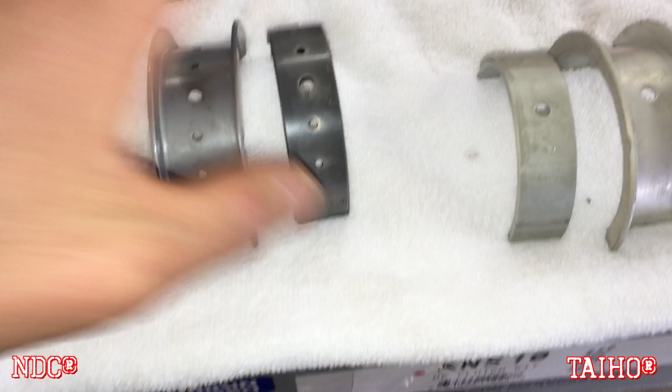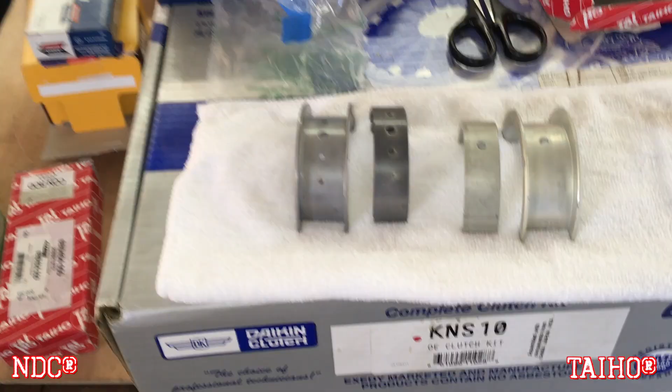Now these are the Taiho. These are the ones I typically like for all the Toyota motors. And they look almost aluminum. The thing to notice here is the number of oil holes. These are throughout all of the bearings. There's 5 holes to pass oil to the crank. These are singular. Let's take a look at the OEM bearings and see what these are. I think they're just the singular holes.

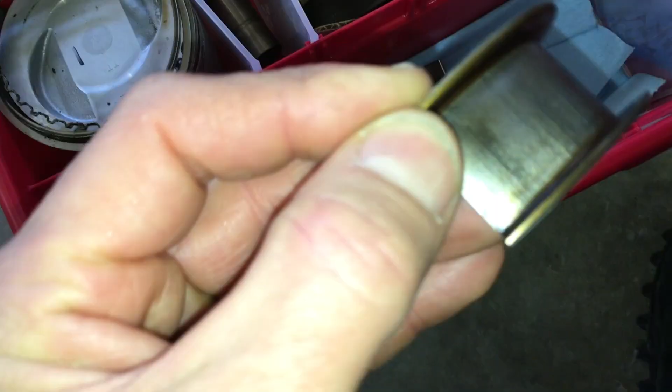Yeah, so these original bearings are most likely a Taiho bearing. Actually, Nissan put their own stamp on it, they don't say. But the color, that's what's so weird, the color on these indicates more of the bearing type that the NDC bearing is, except I've noticed the singular oil hole.

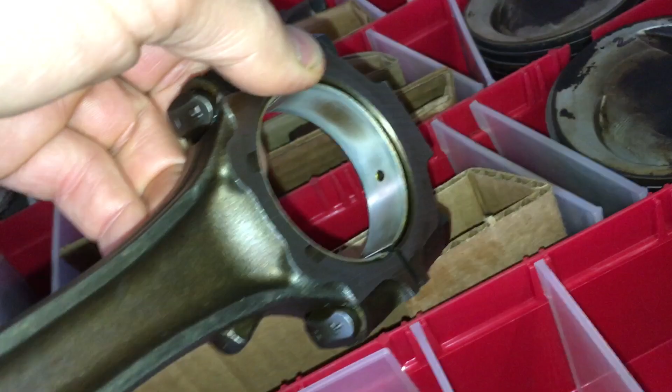Yeah, those are very interesting. Singular oil hole. I wonder if that was like that in both of the engines that we disassembled. This one's out of the silver 2000 Nissan Xterra. This one is out of the red one. The bearings are in there, and they are singular hole. That's very interesting. Well, it makes you wonder which ones are the appropriate ones and which one we want to use.

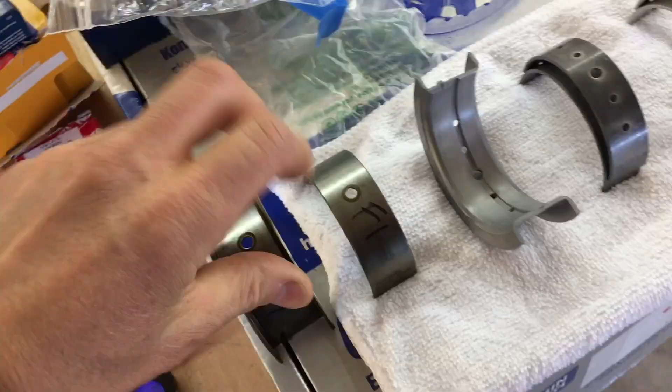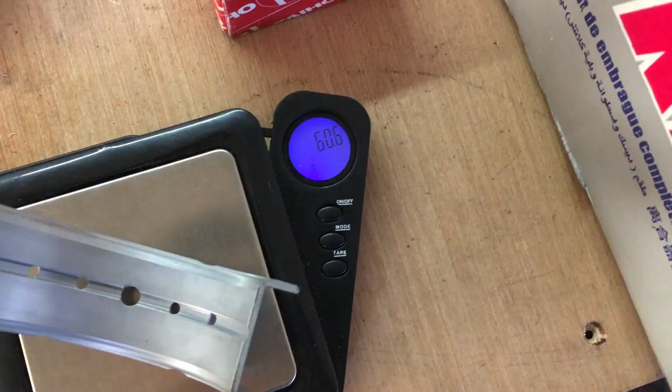The question I wonder is, how much do they weigh? Are they very similar in weight? This is the OEM bearing that was installed. Oh, this is actually out of the JDM engine, 53.8 grams. This is the NDC bearing that's got multiple oil holes in it, a bit heavier, 60.6 grams. And this is the Taiho bearing, 62 grams. It's even heavier. That's really interesting.

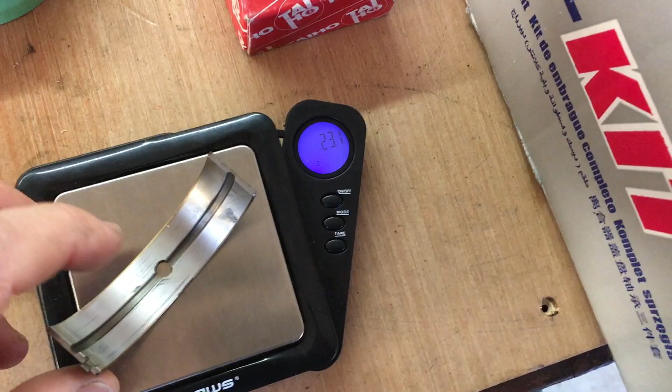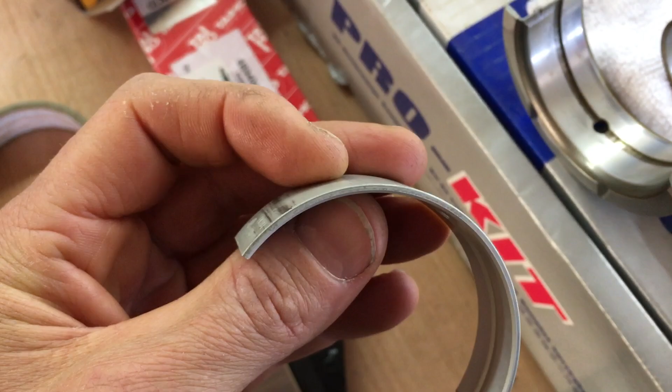So let's look at this, this is the OEM, different position. There's 3 different sizes of bearings on each crankshaft. 23.1 for the OEM. 24.9 for the NDC. 26.2, wow, for the Taiho bearings. That's interesting. What's most interesting is the oil hole design here.

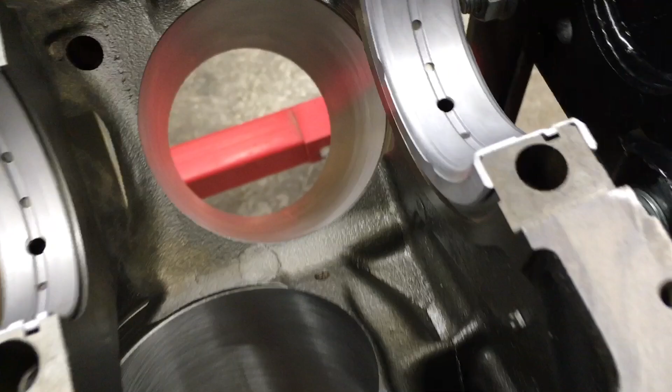I'm not sure that this matters because these are the NDC bearings. These actually are labeled Safety bearings. I've got a little shop in Denver that's really pretty awesome. They have the ability to get all of this stuff from Safety, the company out in California, made in Japan. That's what I usually look for. I can't buy from them directly because I don't buy enough, but the shop in Denver allows me to get these.

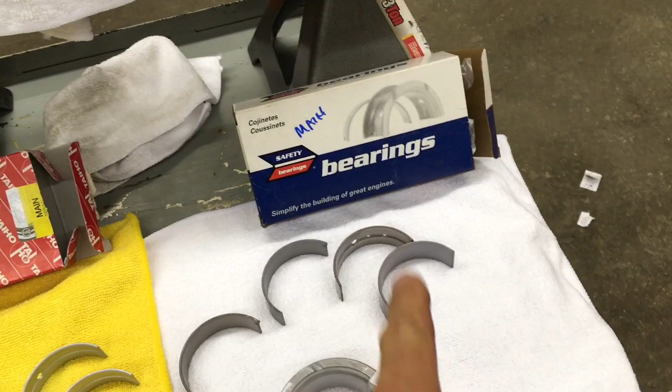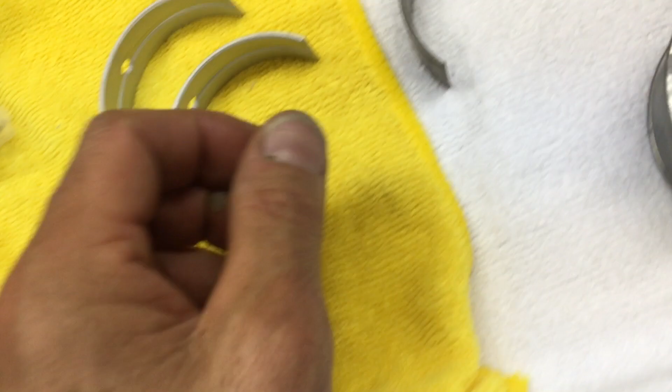And what I noticed right off the bat was the difference between the NDC and the Taiho. There's literally a Nissan part number that's different for the bearings that came from Taiho and the bearings that came from NDC. So that's actually pretty interesting. I'm not seeing Toyota do that with any of their stuff. So these are the NDC and these are the Taiho. And I got this from that same small shop in Denver, but I don't think they sourced these from here. Taiho, yeah, these are original. So, oh, look at this. So these are NDC, this is Taiho.

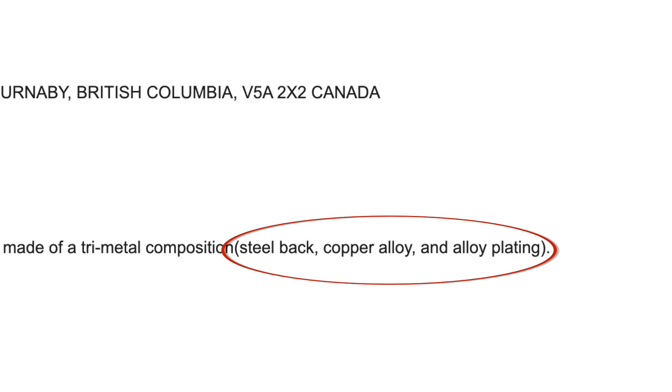And this is supposed to be a tri-metal bearing also. I emailed Taiho and I asked them, and they said these are tri-metal, which you can't really see, but there's supposed to be a base, and then the meat of the bearing, and then the surface. They're all three different materials. Basically indicative of the racing bearings, like King racing bearings, not King's OEM line. Those are only bimetal, there's only two. But the racing bearings have three.

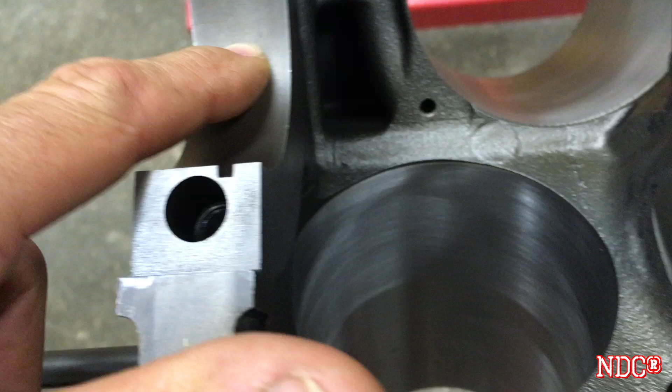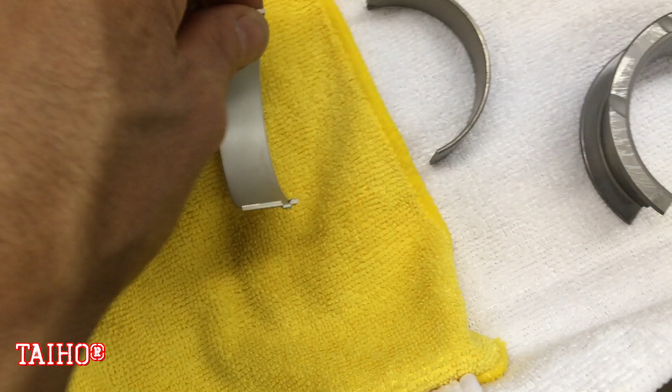These bearings appear to be built for a main that's got a different oiling system. I mean, the only hole that's in the journal is in the center. So these other ones don't feed anything. In fact, if nothing else, they're probably going to cause turbulence in the channel, as opposed to the Taiho bearings that do not have those. They just have this single oil hole. So, boy, in hindsight, I'm awful tempted to go with these bearings. I may have to do a little more homework. Anyway, something to think about.

Anyway, I thought that was an interesting and significant difference in these bearings. So, all right, well, let's get this installed and see where we're at. Let's see how this mics out. We got our bore gauge here, ready to go, all sized to 2.6245, which is the grade on the block, all twos. As you can see here, 2, 2, 2, and 2.

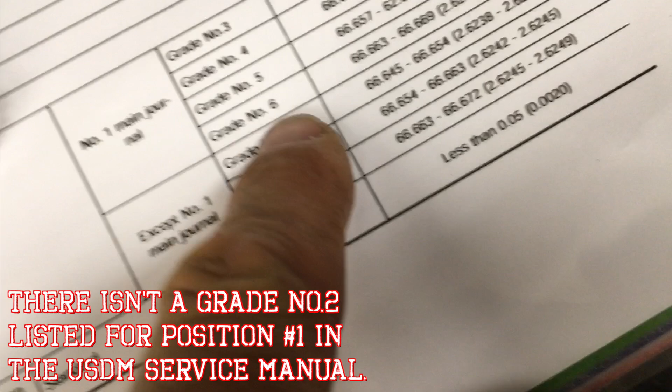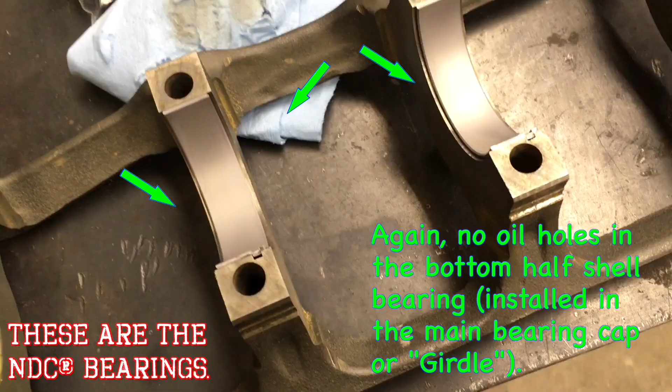So strangely, even though this says the #1 main journal only has these options, the JDM market must have had much better control. All right, well, we have our main bearing cap loaded. Now we're just going to install this on here, and we're going to do it dry. We're not going to put any assembly lube in here, because all we're trying to do is mic this out and make sure our clearances are good.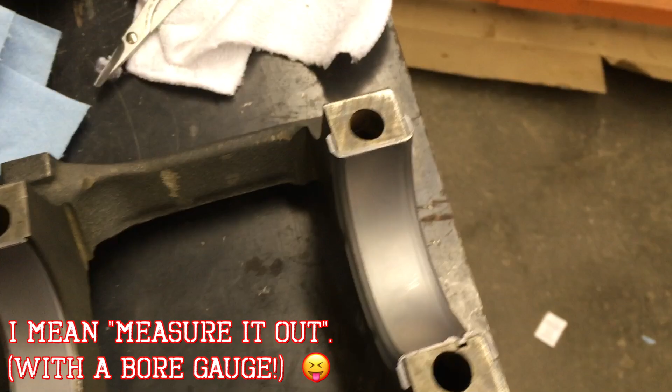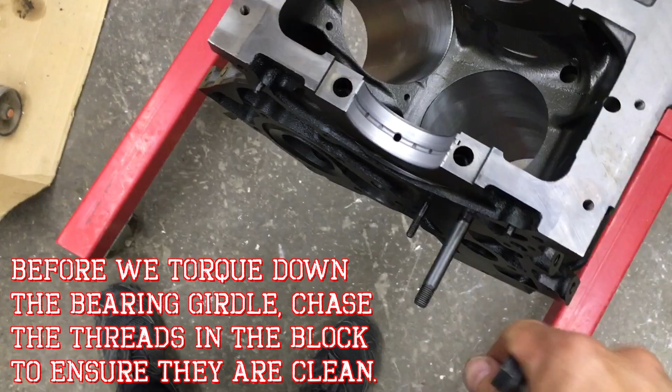So, all right, we're ready to go. Let's stick this on. We're gonna torque it in the correct sequence and to the correct torque, just as though we had installed it. And actually, before we do that, it always makes sense after you've done machine work like this and cleaning to run your bolts in. It's kind of time consuming, but it makes sense to run them all in, run them all out, make sure everything runs in correctly

and there's no resistance. I even have all my bolts marked so I know the original position they were removed from. So this was the 7th bolt in the removal process. So when I go to put these back on, I'll put them in the right order, but ironically the torquing sequence is going to be different from the removal process. The installation position will be different from the removal position. These all feel real good.

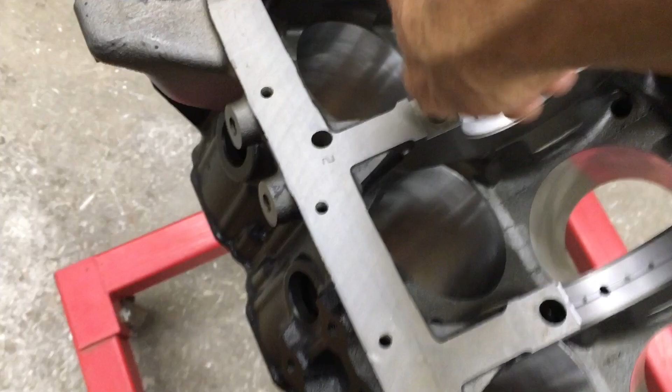Now I washed these out with water, dried it with air, washed it with oil like WD-40, dried all the oil. Just keep things from rusting, because when you use soap and water on this stuff, it will literally rust almost immediately. These all feel pretty good. This one had a little bit of something in the bottom. Let's see what happens when we pull it out of there. Granted, there's been a little moisture. Oh yeah, a little rust in that one. I haven't been cleaning each one, but interesting.

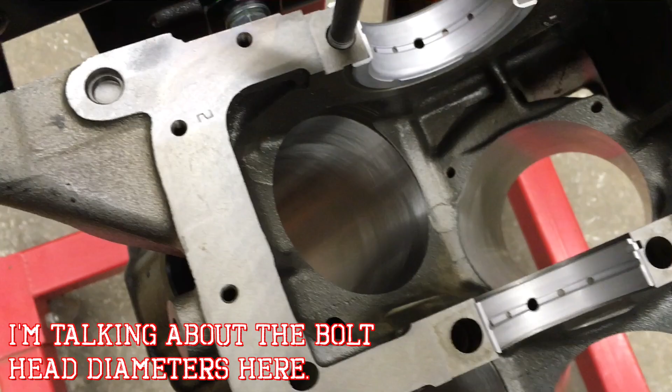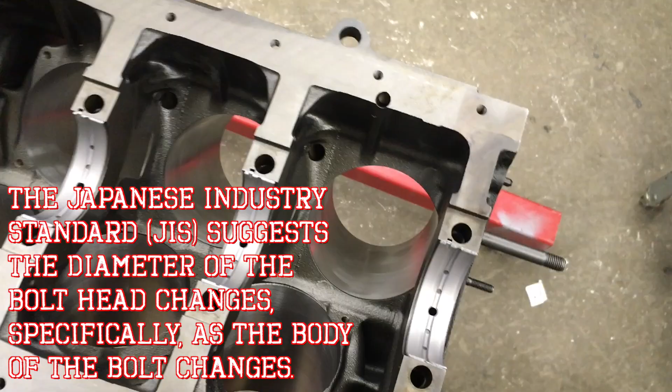They always say to chase every single bolt hole that you're going to install something in before installing it, just to make sure that's all good. Because it's really tough to fix those kinds of errors when you're installing accessories on the engine in the vehicle. So we'll grab some 10 mil, some 14 mil, some 17 mil. We'll run all of these. Now those millimeter references are to the head, not the diameter of the body of the bolt.

All right, let's get that cap on. You really got to be careful too. This stuff is so sharp. If I had more time, I'd go back and clean up all these sharp edges. I might do that on the next few. These are just prototypes to see if these work. But by the way, this is the strangest installation of something I've ever seen. Look how this...

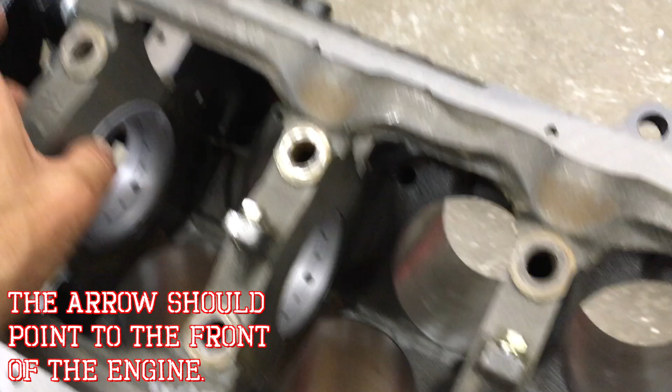Well, this is why we do this. This isn't even correct. This whole thing is backwards. Yeah, the arrow's to the front, which means I've got this bearing cap in the wrong location. All right, let's fix that. It's always tough to tell. And this stuff is so heavy that you kind of just want to use logic. The logic I had was that the front end was the narrowest. So this is wider back here and it squeezes down, becomes more narrow here. If you look at this, it's really tough to tell.

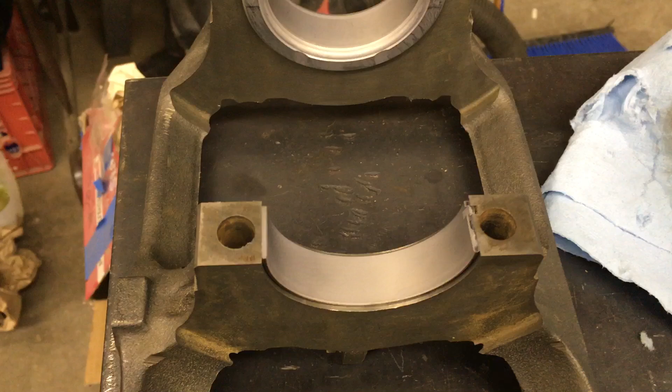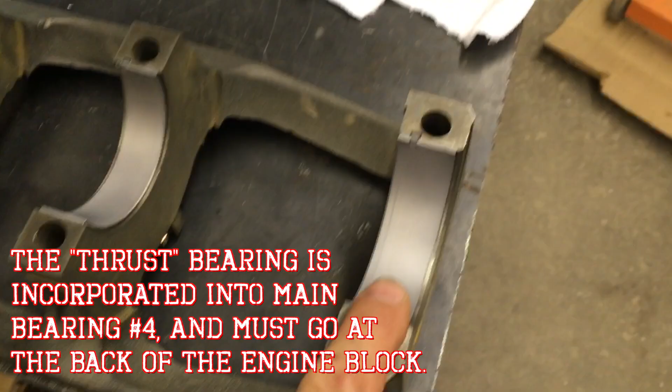Well, I guess really you could do it like this. Line it up against the edge of the... Wow, maybe not. It's really tough to tell if it gets narrower there or there. But this bearing needs to be here, and this bearing needs to be here. So let's swap those. Okay, we got one swapped over. That's an easy mistake to make. You have to be really careful. Always check your work.

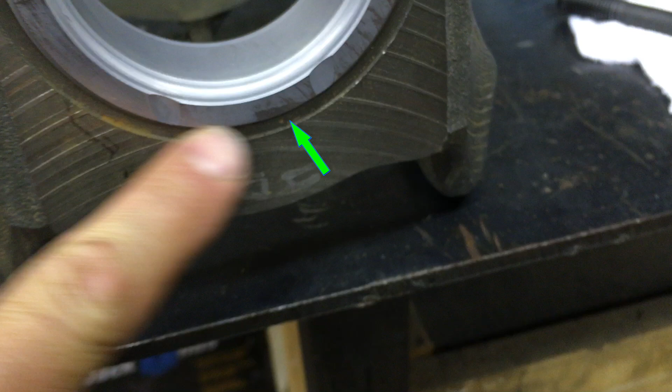And you can always tell, you almost can't do it wrong as long as you're paying attention, because this groove here will not fit here. There's no groove here. That groove fits that groove.

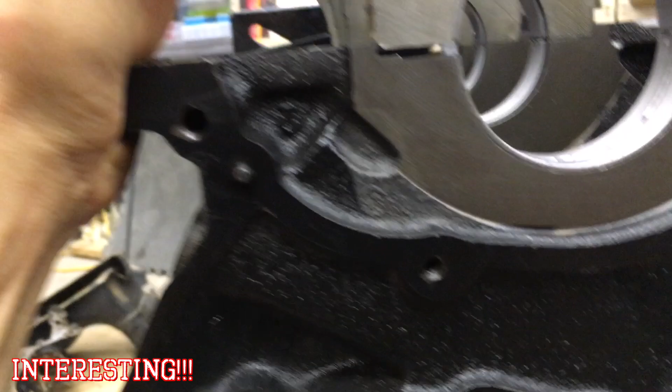All right, let's get this on there. This doesn't fit in there. You literally have to smash that in with a rubber mallet. Smash being the inappropriate key term, but this all looks pretty good. This didn't get shot peened, which is why the color is different. But you can see the grooves line up here at least.

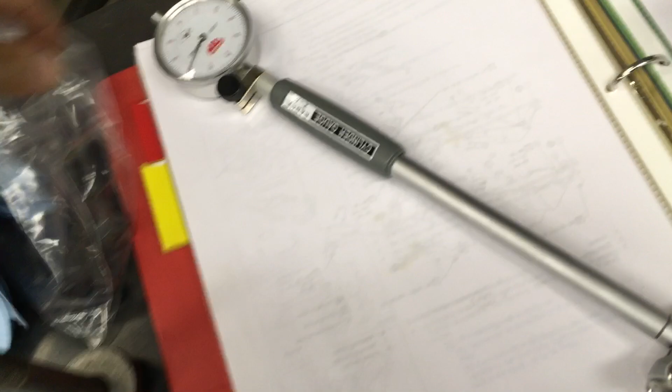And always pay attention to stuff like this arrow, that it does indicate the front of the engine. So, okay, let's tap that sucker down and get those bolts in. By the way, when we mic this out, we got to keep in mind these journals. Actually, they should only be off by about 1/2 of a thousandth of an inch. Remember the whole temperature issue.

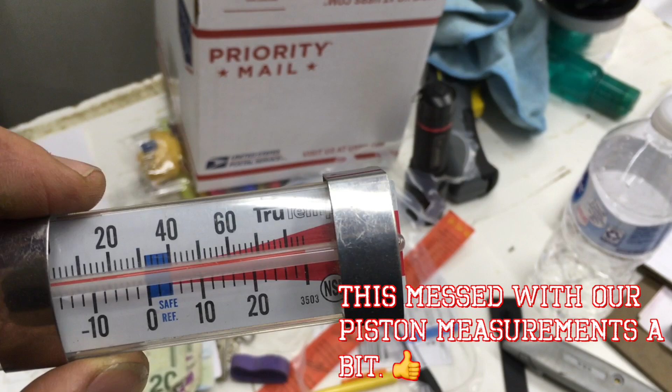We got to look at our thermometer. Oh boy, it's warm in here. This says 60, 70, 88. Holy moly, that could be 88. So for every 10 degrees over 70, which is almost 20 in this case, we're going to be off by 1/10 of a thousandth on an aluminum.

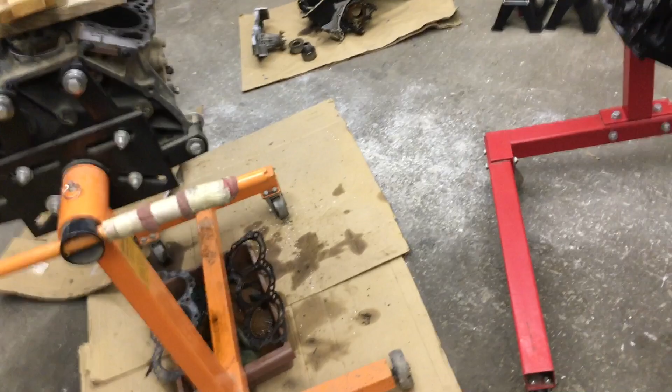These are steel. That's usually about, I think, half the rate, but we're almost 20 degrees hotter, so it should be close to about 1/2 of a thousandth off. So we're going to be a little too wide by 1/2 of a thousandth, which is interesting. I did find that the spec was right in the middle either way, but I'll have to keep that note in mind and maybe redo these again in the morning and see where they're really at.

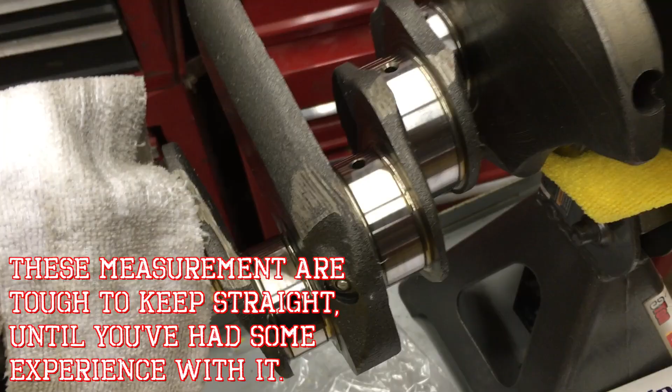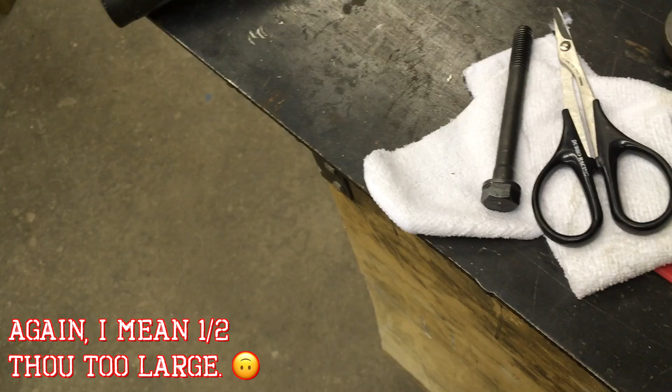But when we use the bore gauge, it doesn't matter, because we're setting the bore gauge off of a mic that's already 1/2 of a thousandth too large. So this will equalize. So this is less important when using this tool.

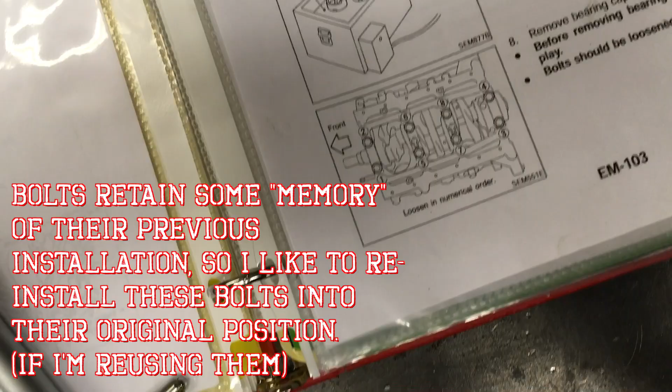So let's tap that down. We got our relatively heavy rubber mallet, courtesy of our friend Roger. So let's get this on there. So this is the order that we removed these. So I'm going to grab our bolts, put them back in that order, but then I'll tighten them according to the tightening torque. So we've got 5.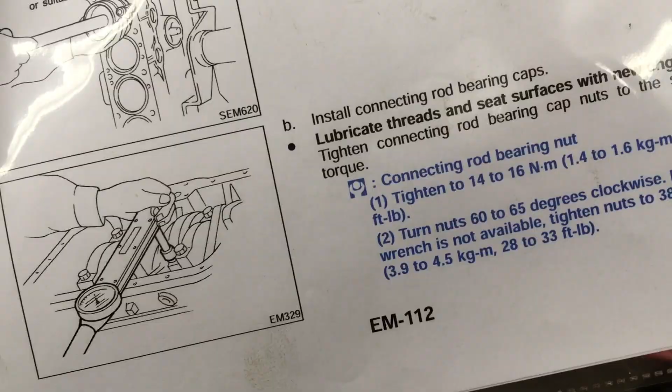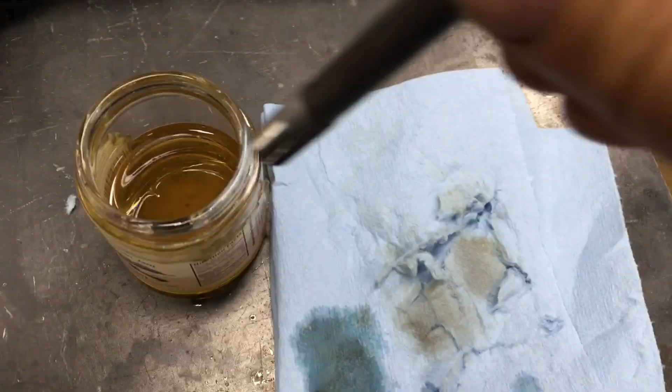Just there. Let's figure out what the torque is. Torque specs. Now, those are not the main bearings, that's the rods. I skipped all the way down here, didn't I? Lubricate threads. I leave this stuff laying around for purposes like this. This is actually a 10W30 oil, so we'll just use that. Dipping it in here, letting it drip off, then rubbing the excess off here, and dropping it in.

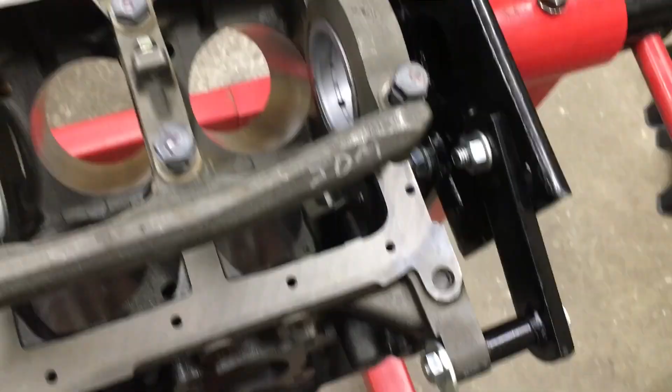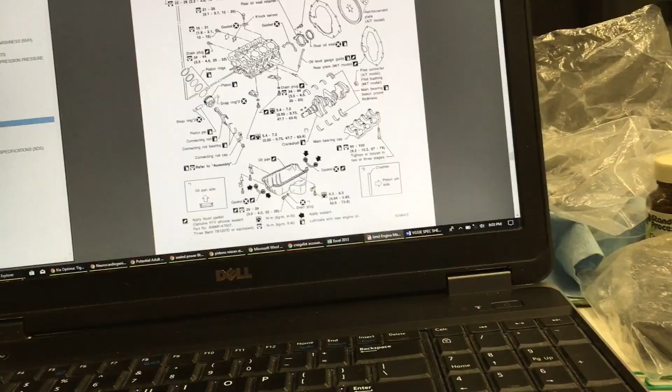All right, let's get a torque wrench out and get these things going, and do it in 2 or 3 passes. I must not have the right page for the torque specs on that, so I'm gonna grab the laptop and pull the PDFs. I don't actually have the physical print of these manuals, I've just got the PDFs. So, let's hook this laptop up and see what we can find. Should be on this page, there it is.

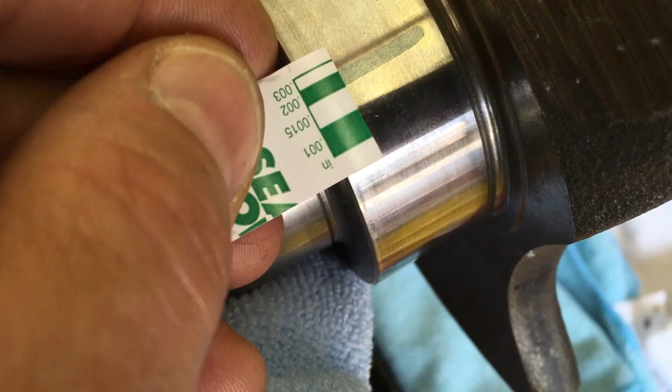Actually a bit excited about this process. I've always wanted to be able to measure bearing clearances without using Plastigage. I don't think my bore gauge is going to work in the rods. Yeah, actually it probably could. The rod bearings I probably could do too. Not the piston pin bore end of the rod, but the main side of the rod. Looks like I might be able to get anything above 2 inches. So as long as they're not under 2, which is what the head is, those are under 2. So I can't measure the bores in the head.

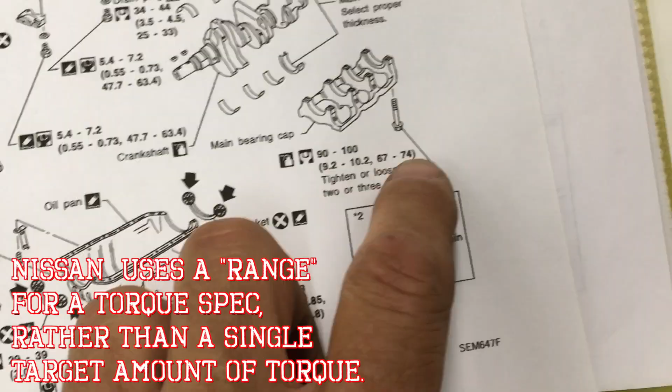So this says foot-pounds 67 to 74. Okay, that's a decent amount. We'll just shoot at 70. I didn't show you, but I just cranked them all down. All right, first opportunity at checking for bearing clearances this way. So bearing clearance, number 1.

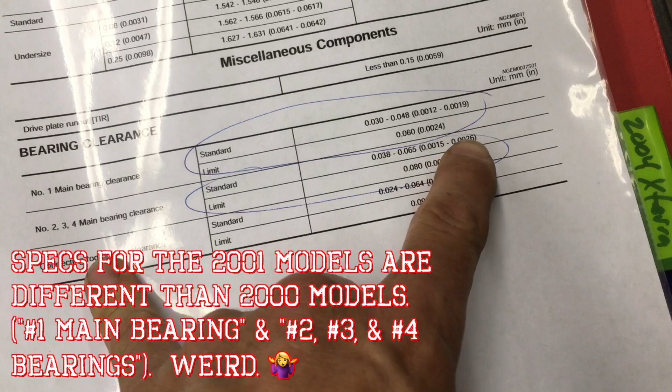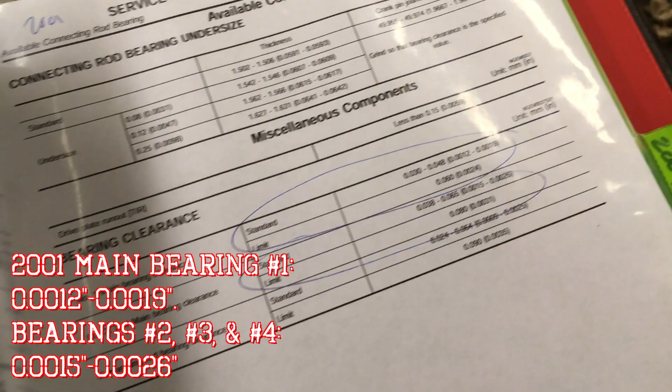This is different than the 2000 version. I have a feeling mine are all going to be the same. 15 to 26. Wow, those are very different. Let's see on the 2000. These all say 11 to 22. So, good God, who knows? The 2001 is telling us something else. So, number 1, 12 to 19, 15 to 26 on the others.

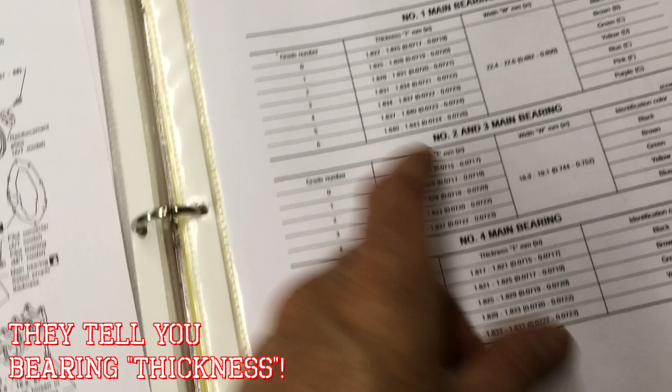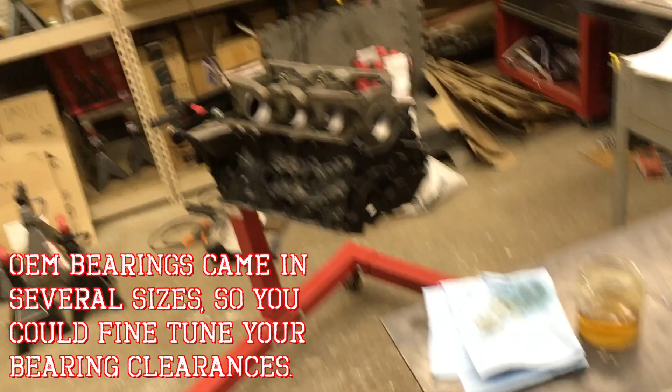I don't even know how thick those bearings are. Can't really mic them very easily. It's a standard size bearing. Do they even tell you what the bearings should be? Yeah, they do. Here we go. If I remember right, these were always in the middle. When you go aftermarket, they're all one size. So I'm going to be trying to figure out what I expect this bore to be. But I don't even know.